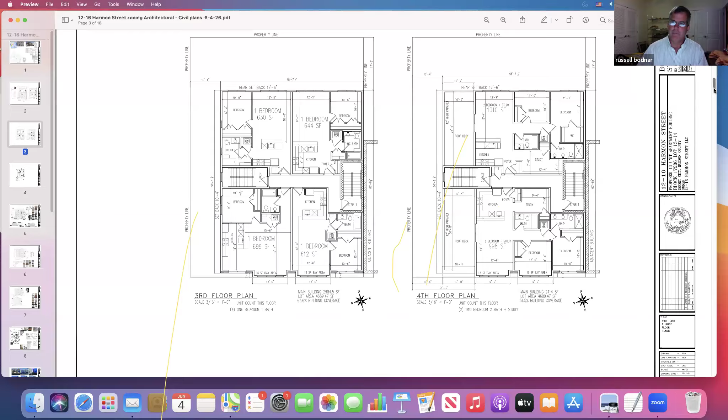By doing so, I needed an extra staircase, because with a 3-story building I'm allowed 1 stair, but with a 4-story building I'm required by code to have a second stair. On this level we have two bedrooms: a 2-bedroom study in the rear at 1,010 square feet, and a 2-bedroom study in the front at 998 square feet. So as we said earlier, we have the 10 one-bedrooms, the two two-bedrooms, and the one three-bedroom, which is our affordable unit.

If we go up to the roof deck level, we have a roof deck that's 750 square feet, as you can see here, and we are set back from the front yard, basically from Harmon Street, 13 feet 5 inches.

We were also set back an additional 7 feet from the neighboring property to the left, which gives us basically 28 feet from their property on that roof terrace down to their property. So if there's anybody on that roof area, it's an ample distance away, almost 28 feet from their property, almost a whole rear yard and a standard 100 on a standard R1 at 30 feet. We're trying to accommodate that. Even here from the rear, we're 17 feet, another almost 10 feet, that's

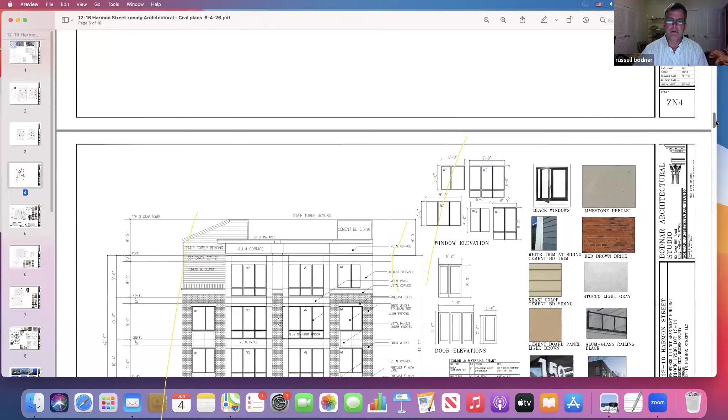27 feet from the back property line to the rear deck as well. If we go down a little further, this is our elevations, our street elevation. As you can see here, we have that 3-story space on the left-hand side, and then we bump up to a 4-story space. The only thing still raised a little, that's set back, is the stair tower, because I was required to have that extra stair tower. If we go down a bit further, you can see how we're doing our massing.

At the other end of the block, past Randolph, between Randolph and Grand Street, is called NC1. NC1 is allowed to be five stories the entire block. So right now there's an approved 5 stories at the end of the block on Grand Street, and I know of another project going in here that's going to come in as of right as well. There will still be only the vacant lot on Randolph left out of the entire block on the left-hand side. This has nothing really to do with our project.

We're just saying this is a 5-story building on the left. The existing building on the right of us is a 5-story building built about 3 years ago. We are now stepping down to our 4-story building right next to it, and then a 3-story building adjacent to that. As you can see with the grading coming down, basically the top of their 2-story plus building is basically the height of our 3-story building, so it's pretty much comparable to what they're having.

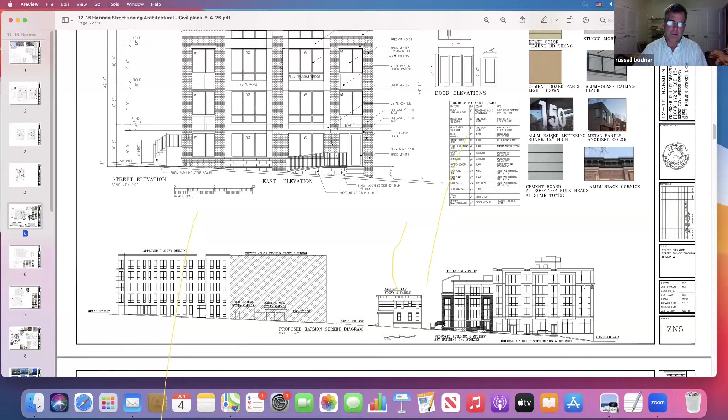And you can see here, now we left ample room. The only thing we have here is a staircase that brings us down, the stair coming down, because I need a means of egress out, to that staircase that walks along the side of the property. As we come here, you can see the rear of our elevation has just, basically, a vinyl fence all the way around the property at the rear. This is just a rear elevation showing some windows and some doors going out to the backyard.

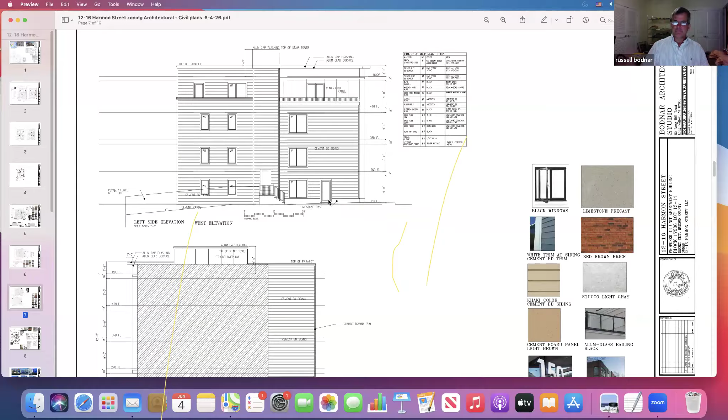As we go further down here, this is the side the neighbor would be looking at, the left-hand side, the west side. We did put some windows in along that side. There's not a ton of windows, but we did have nice siding and windows, and that little terrace on the upper level with some cement board paneling and other decorative items. So the side of the building has a bit more appeal, not just a flat wall, like you can see on the other one that's right up against the property line.

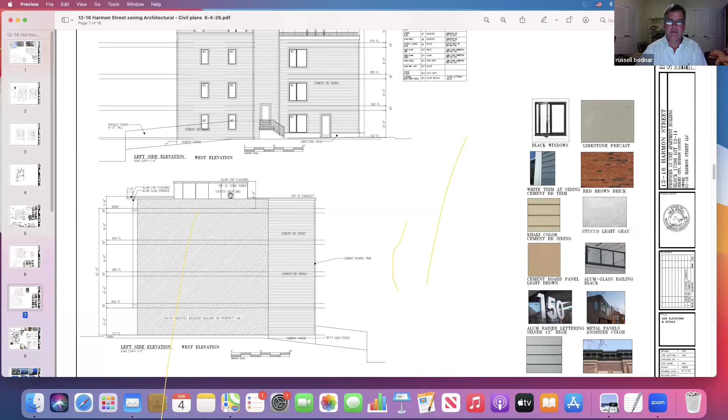If we build an as-of-right building right against the property line, I can't put windows on that side. So you're just stuck with, on the right-hand side that abuts the other neighbor's 5-story building, just a blank wall. There's nothing on it, just a little bit of siding where they have a jut-in, but the rest is actually a hatch section that's literally pressed up against the adjacent building.

Hold on, one second please. I'm talking too fast for you, I think.

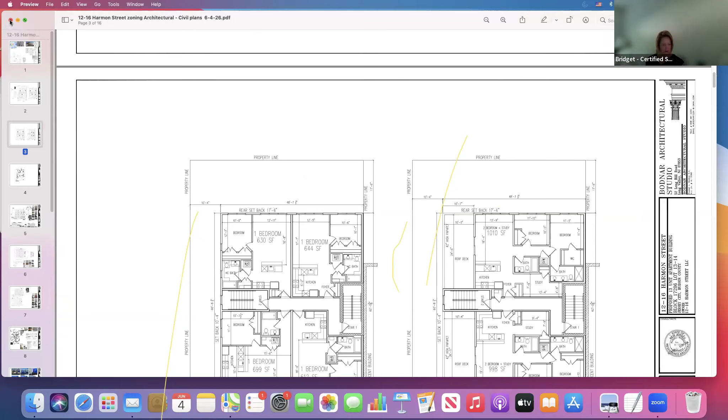No, Russ, stop, Bridget had to step away. I have to shut my in-the-wall air conditioning off, it's too loud. In an old apartment here. And yes, you are too fast, both of you, so slow down. Sorry, Bridget. Thank you, you're always sorry. Okay.

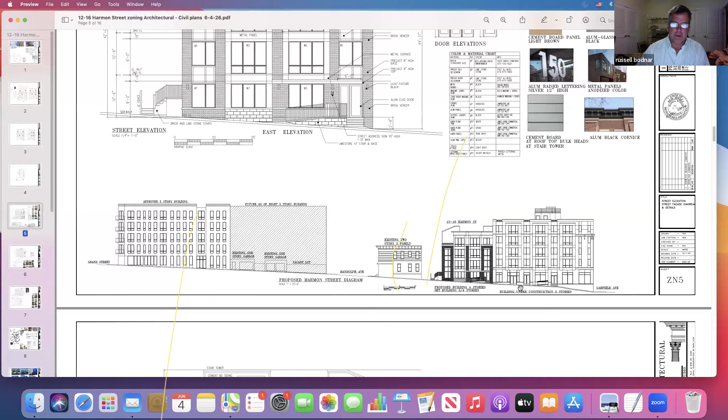Basically, we're trying to go in a way. We went away from the original 5-story building that had parking, which is one of our variances we're going to need now because our lot's more than 50 feet wide. But we went away from the parking, because they didn't want a very tall building, to get the 4-story building in with the drop down to make it 3.

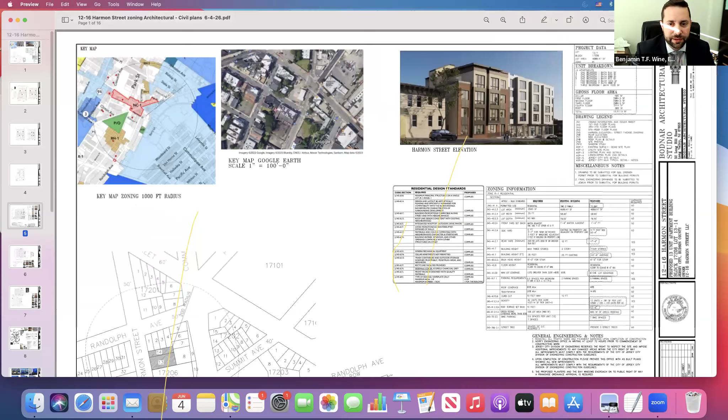Russ, talking about some of the site conditions, I want to confirm for the record again, as I indicated in my opening, we are well under on the coverage. I think the board now sees why we were able to do that with that large side yard setback. But I just want to confirm we are nevertheless proposing stormwater management on this site. Is that correct? Correct, we are proposing the stormwater management.

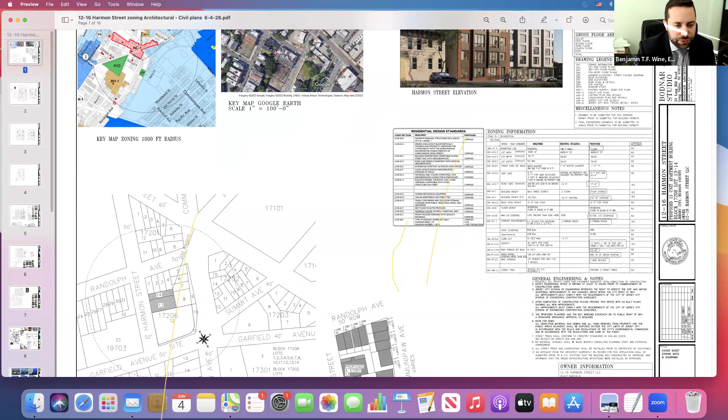Okay, so that will make it, even though it is well under coverage, a better condition than would otherwise exist. Is that right? Correct. And then in terms of the streetscape, if you can just go to the site plan sheet, I want to confirm the street trees, the sidewalk repair, things of that nature.

Yeah, we'll go back down. Can I interrupt one second? I just wanted to let you guys know that Commissioner Shadid is on. I just promoted him. Okay.

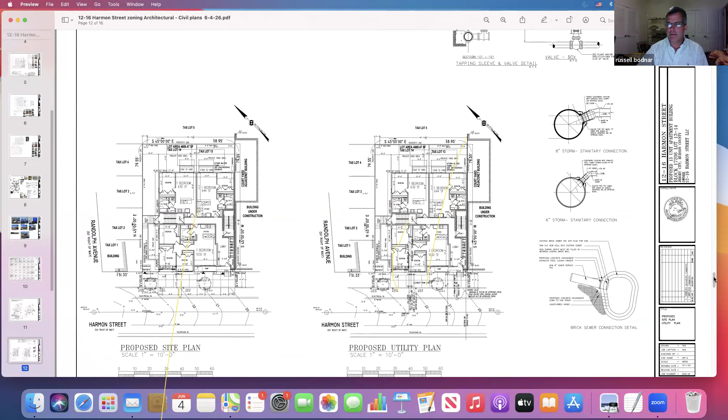All right, as you can see here, this is our proposed site plan. You do have the two trees now we're adding to the site. We also have some landscaping around the corner. If we go to the landscaping plan further down, you can see we have landscaping in the rear of the property, landscaping in the front, and some landscaping on the side here as well. So we added a lot more landscaping than we originally had on the original design, as well as having our two street trees that we're required to have, since we are a 50-foot lot.

And Russ, staying on the landscape plan, so all that area on the side, that's just proposed as green grass right now. Is that right? Yes, we have a little sidewalk that goes back to the staircase, but the rest is all green grass, and this is also all green grass all the way around. We just have a little walk out to our yard in the rear.

And then the rest of this is landscaping along the rear, and some landscaping items up here in the front as well as in the front of the building, because our three bedrooms are there, and the bedrooms were on the front of the building, and we're pretty low to the ground there. I wanted to make sure we had some landscaping to kind of break it up when you're walking down the street, so you're not just right up against the sidewalk to the bedrooms.

Okay, and Russ, one other thing I didn't have a chance to ask you ahead of time, so I'm doing what no lawyer should do and asking his witness a question he doesn't know the answer to, but I'm pretty sure I know the answer. I did speak with Miss Webb earlier today, the neighbor. Actually, this is a good shot because she is tax lot 3, so that's to the left. And I did offer, and I spoke to our client, and he's perfectly fine with it. I just want to make sure it's okay with you from a site plan perspective.

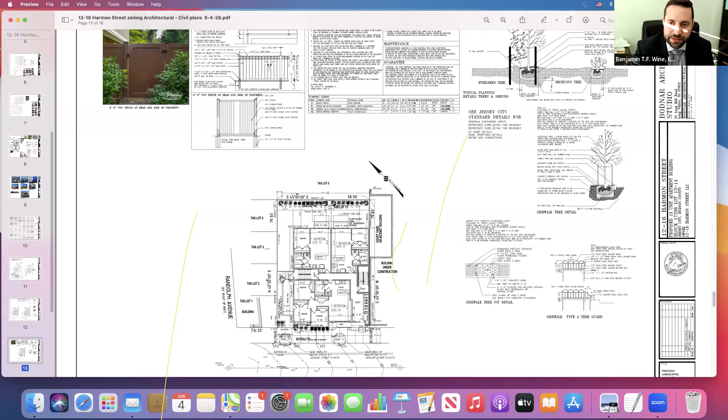Okay, perfect. All right, Madam Chair, I think that's all I have for Mr. Bodnar at this time. Okay, do you have any other witnesses that you're going to bring forth? I do, unless you had questions of Mr. Bodnar first. We'll save our questions till the end. Sure. So with that, like I said, I do have a site civil engineer. I don't intend to call him up. There's not much by way of engineering beyond the stormwater that Russ testified to, but he is here in case the board has questions afterwards. So with that, I would call up our professional planner, Charles Heydt.

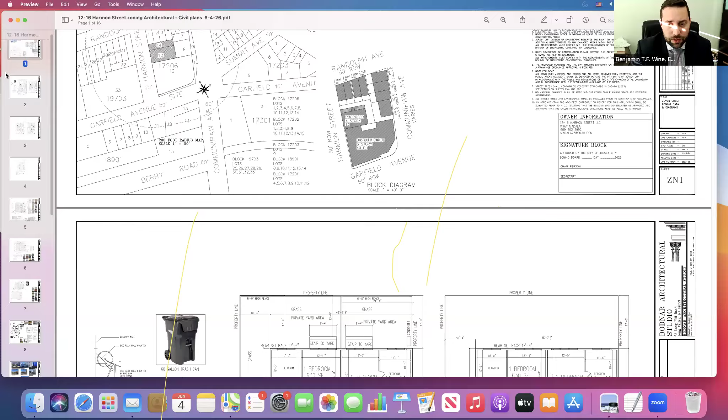Hi, good evening. Hi, Charles. Would you raise your right hand to be sworn? Yes. Do you swear or affirm the testimony you're about to give in this proceeding will be the truth, the whole truth, and nothing but the truth? I do. Thank you. Okay, and Charles, just for the record, you could go through your whole qualification list, but suffice to say, your license is in good standing here this evening.

Good standing, and I have the distinct pleasure of working on a variety of land use applications throughout the City of Jersey City for the better part of the past 10 years.

Yeah, we've seen Mr. Heydt many times and we accept his expertise.

So, Charles, you heard the testimony that Mr. Bodnar presented regarding the overall existing conditions and proposed development, as well as the variances. I would ask if you can please walk the board through your presentation with respect to addressing the D&C variances that we have. Yeah, I'd be happy to.

Good evening, board members. It's nice to see you all virtually. I know through the summer there's been a change in venue here. We had the opportunity to engage with this application team and truly try to envision a project that balanced what the development and the property could generate or accommodate, and how these properties sit within one another on the subject block, understanding the overall neighborhood.

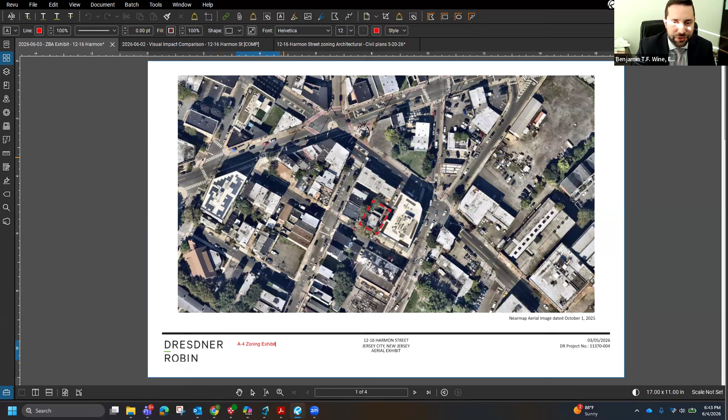And then our second exhibit is the zoning visual impact comparison. So I'll mark that. Board can probably recognize this intersection. Is that A5? You're up to A4, or Ben, should this be A4 or A5? That should be A4, I think you just confused Bridget. You haven't presented A5 yet, you just alluded to the fact you will present A5. Correct. Okay.

Okay, so this is A4. The board should probably be familiar with this intersection, eloquently referred to as the junction. It's identified in the master plan in a small area vision, where we look closely at some of the dynamics of this neighborhood. Just to the west of Morris Canal, a little across Garfield Avenue, a little further south is Berry Lane Park. Off this screen to the west is Arlington Park. It's referred to as the junction because of 3 main intersections, the confluence of 3 main roads: Communipaw running east-west, Grand running east-west, and Garfield Avenue running north-south. The subject property, highlighted in red, is located just a block off that intersection of those 3 major roadways, and ultimately it's a unique area in the city.

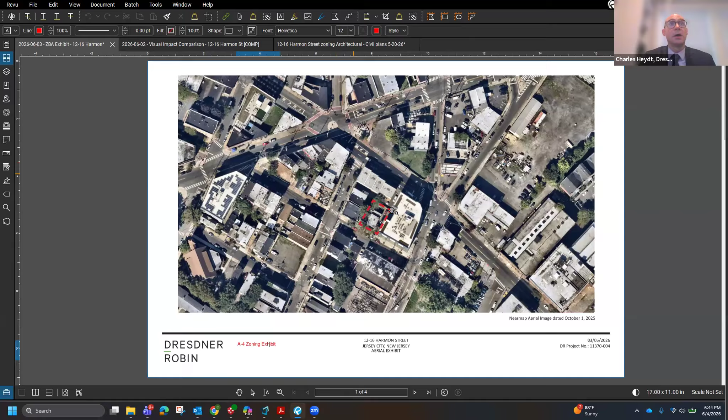As I zoom in here, you can see the rooftop of the 5-story apartment building we were referencing earlier, and the other rooftops. This property is the only interior lot on the block.

What that means is it's the only lot with frontage on Harmon and 2 side yards. The adjacent properties along Randolph—one is a corner lot, the other has frontage on Randolph. So while it's our side yard to our west, it's the adjacent property's rear yard. We're meeting a side yard with a rear yard, which is just a unique scenario. It does happen in the city.

Obviously this block isn't your standard 200 by 400 foot block of parcels, but it's a unique condition that I think is probably the start of the conversation from a planning standpoint about how best to deal with a scenario like this.

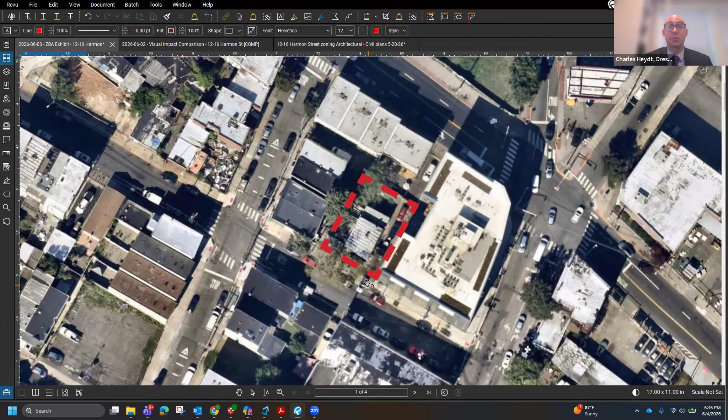I should mention to the board that the property is 4,689 square feet. We have approximately 59 feet of frontage on Harmon, and the site has 2 structures on it. One underwent a small fire and is no longer habitable—that's a 1-story structure—and then there's an adjacent 2-story structure. We do have photos if the board wants to review them.

From a zoning standpoint, as we mentioned, there's a mix of zoning within this neighborhood. You have the R1 zone, or the north end of the R1 zone. We have the NC district just across Randolph on Harmon Street. And there's obviously the Morris Canal redevelopment plan, where there's more intense multifamily development along Garfield Avenue. You can see the Berry Lane reference the street, but just south of that is Berry Lane Park.

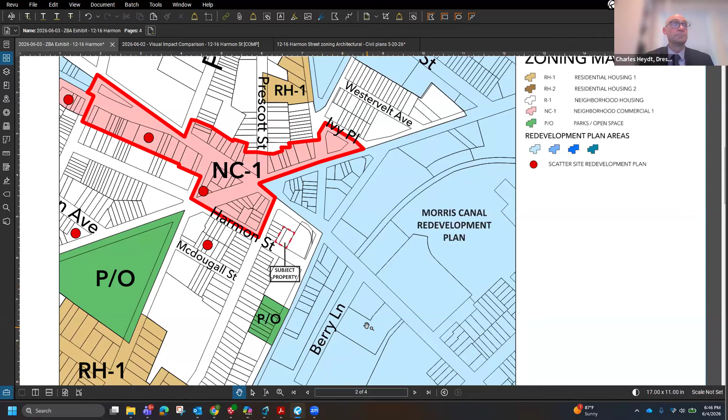One of the other aspects—and this is a slightly larger view of the overall neighborhood—I think was important when we wanted to present the existing conditions, is the sense of a diverse neighborhood. This is a very robust neighborhood, in my opinion. While it's referred to as the junction, it's one of the locations in the city that actually has a great deal of access to public open space.

You're 1-2 blocks north of Berry Lane Park, which is a tremendous asset in the overall community. You have Lafayette Park, which is a small walking path area, and then Arlington Park, just west of the subject property. Open space is always a key characteristic of a healthy, diverse community.

It's where you want to localize added residential units in a neighborhood like this, and in this neighborhood it has it. In addition, what we did on this aerial is highlight the transit in the neighborhood.

So when we speak of transit, it's really all alternate modes of transportation, including bus, light rail, and bicycle paths. We have a number of planned and shared use bike paths shown in green. This is a bike path along Grand Street that is protected and then becomes shared. There are other shared routes through this neighborhood on some of the side streets.

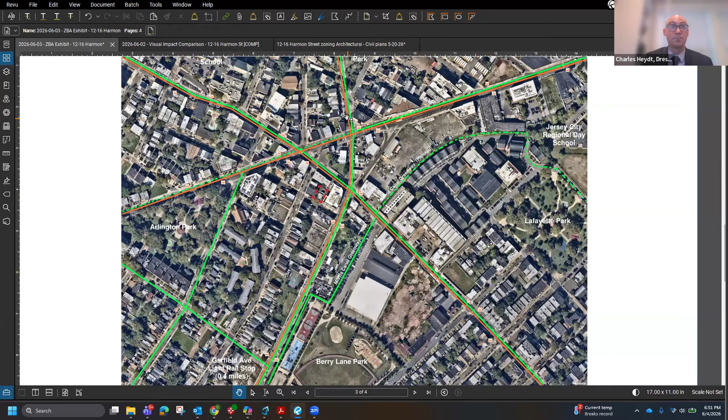As we look at some of the existing conditions of the property, I wanted to share some photos. This is the newer structure at the corner of Harmon and Communipaw, the 5-story building. In the middle are the existing 1- and 2-story structures. This photo shows a very good example of the rear facades of the westerly neighbor from the subject property, with approximately a 14-foot setback for the rear yard.

So these lots are quote unquote undersized as it relates to zoning. There's a walkout, more or less just patio space in the back of these properties, but essentially the existing condition of this single story structure is on a lot line, which would allow for a lot line condition to exist moving up. That's part of the analysis we did, which I'll get into in a minute.

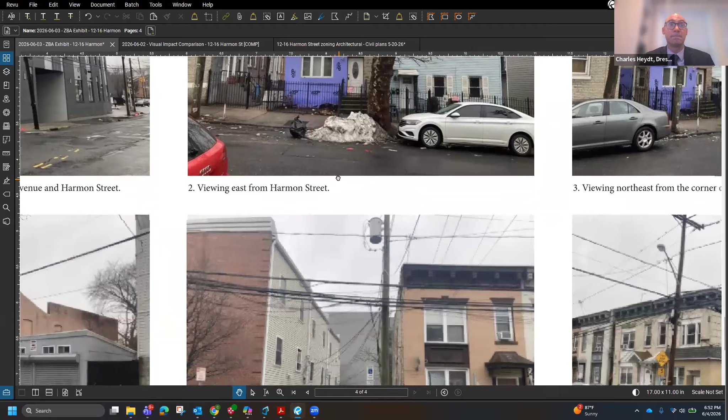Some of the other photos show the surrounding properties. You can see from the corner the 5-story structure in the rear at 475 Communipaw. You can see the grade change over the frontage of Harmon, and the two-story structures along Randolph. Our goal with the project, as mentioned before, is to continue this transition that steps down to the two-story homes on Randolph through a very appropriate design on this subject property.

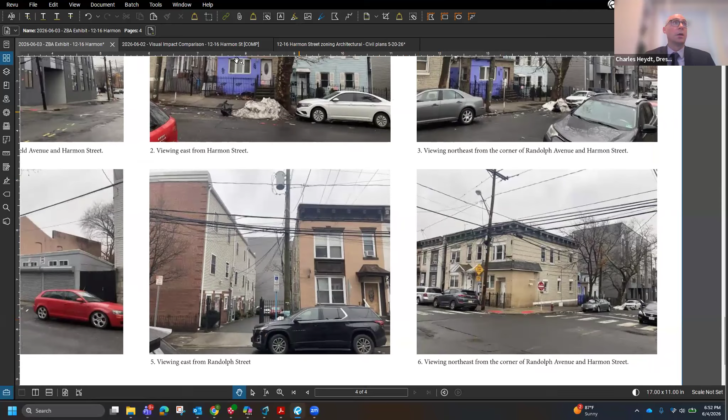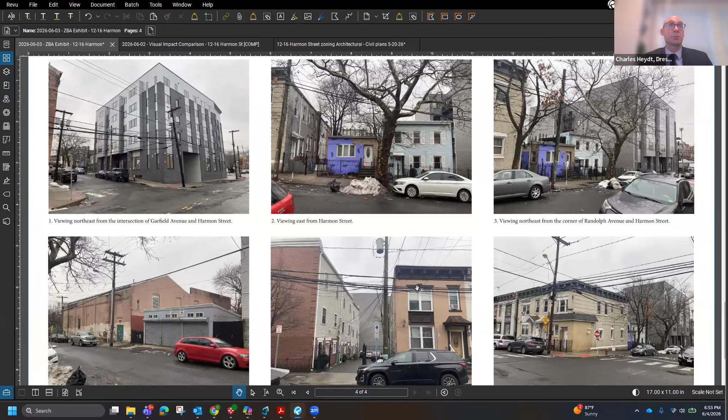With respect to density, we are at 4,600 square feet. The R1... sorry, I'm trying to stop sharing my screen. Give me a moment.

The R1 district does permit residential uses, so we're not requesting a D1 use variance, but it does limit the density of residential units to 42 units per acre. What's being requested with this application is 13 units, so it's in excess of the permitted 42 units per acre.

The adjacent property at 475 Communipaw Avenue is approximately 160 units per acre. That project was approved, but it's not necessarily the same type of development—it was an automobile car wash, so we were transitioning a non-permitted use into a permitted use. But we clearly have a less dense development than that subject property at the corner.

There are other developments in the area referenced earlier. 747 Grand is a 36-unit multifamily just a block to the west, as well as 509 Communipaw, which is equally 36 units. So not to compare the unit count directly—we're only 13 units—but to note the reality that there are multifamily developments within this immediate neighborhood, within a 1 to 2 block proximity.

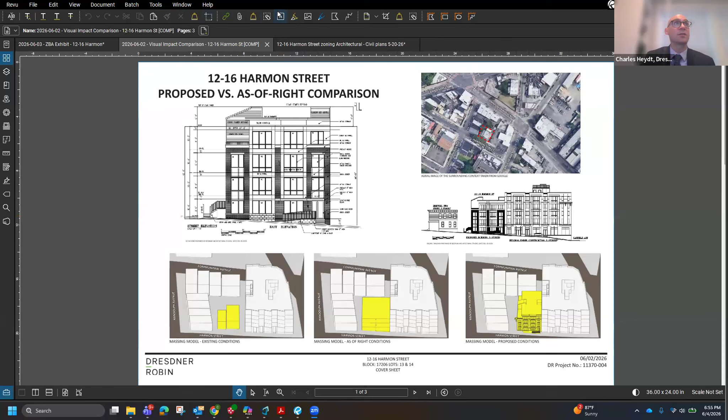The next exhibit I think is helpful is what we prepared this past week to help show the board this transition of floor area. I'll mark this as A5. Yes, and Charles, can we just call it the visual impact comparison? Yes, okay. We submitted these, but I'll submit the marked copy as well after the evening.

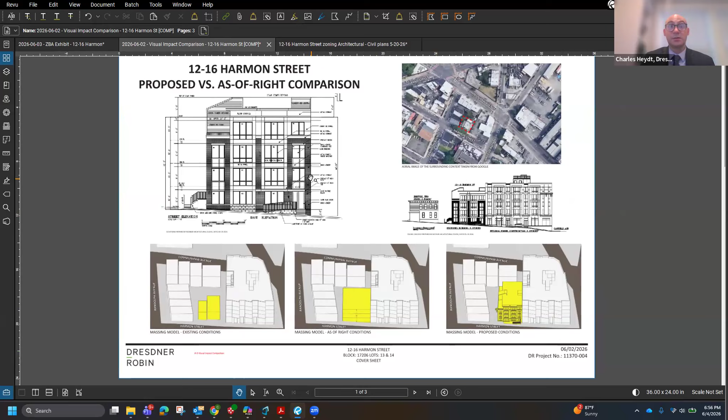What we did, in a very technical manner, was scale it to the existing surrounding developments. We took the overall elevation of the facade as designed by Mr. Bodnar—the 3-story section in front and the 4-story section to the east—and modeled that in a 3D environment. This shows the massing, and you can kind of see some of the texture of the facade treatment on the proposed structure.

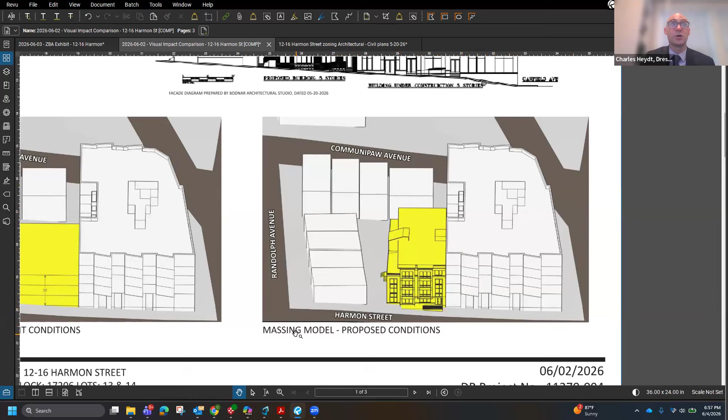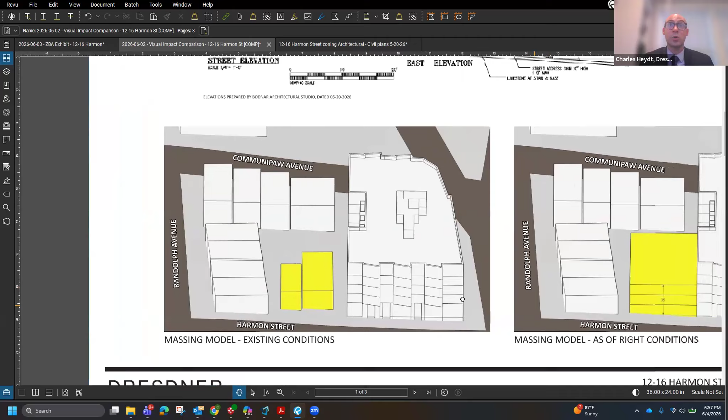It shows the massing as it relates to the adjacent 5-story structure and the adjacent 2- and 3-story structures on Randolph and Communipaw. But more importantly, starting from the existing conditions, you can see the 1-story and 2-story structures that actually sit on the property line and have the greatest impact to the Randolph properties. 3 stories is permitted in the R1, and we tried to understand what a permitted zoning envelope would look like—this has a rear yard of 19 feet and 0 lot line, 0 side yard setbacks.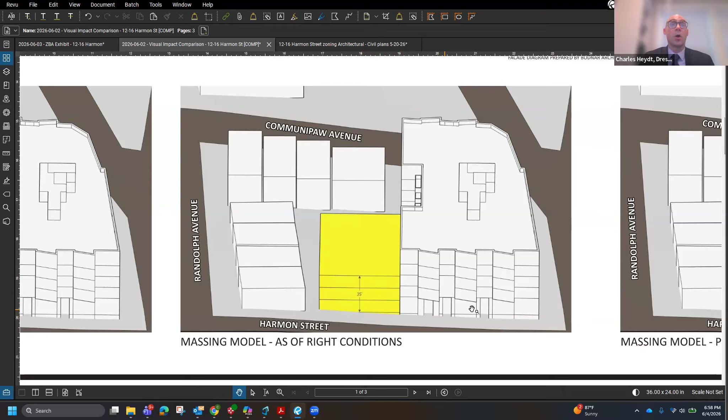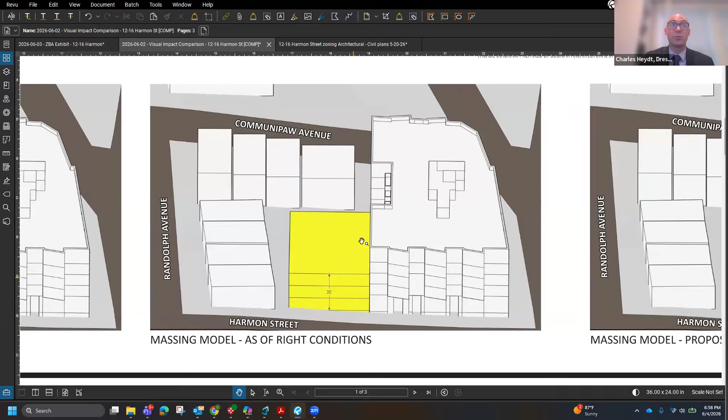Ultimately, this floor area is what would be permitted by way of this overall massing under R1, because of the size of the property and the existing adjacent 0 lot line conditions. Part of the process here is to understand that this 3-story structure along our side yard is actually marrying against a rear yard for our adjacent neighbors to the west. Is there a way we can make that setback better without losing or sacrificing some of the entitled zoning that would be generated on the site?

What we did was ultimately say, can we set back our side yard, where 0 feet is permitted today, approximately 10.5 feet, 10.4 feet to be exact. And then can we transition some of that zoning envelope, the floor area, to a 4th story on the east side of the property, further away from the rear yards of the adjacent properties to the west.

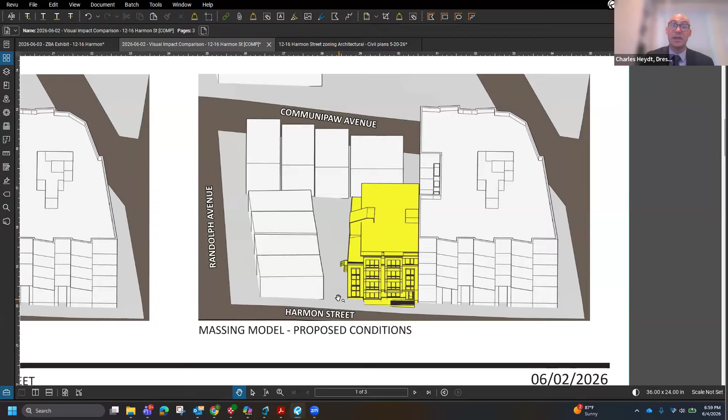This exhibit kind of walks you through that process from a massing standpoint. Again, you can see the roof lines of the 5-story building stepping down to the 4th story, then stepping down to the permitted 3-story height, and then providing that greater 10-foot separation between the building and the lot line, which in my opinion is an improvement beyond existing conditions and an improvement over what's permitted by the zoning envelope. So hopefully that was helpful for the board.

You can see here from an elevation standpoint, taking a minute to load, the 5 stories going to 4 and going to 3.

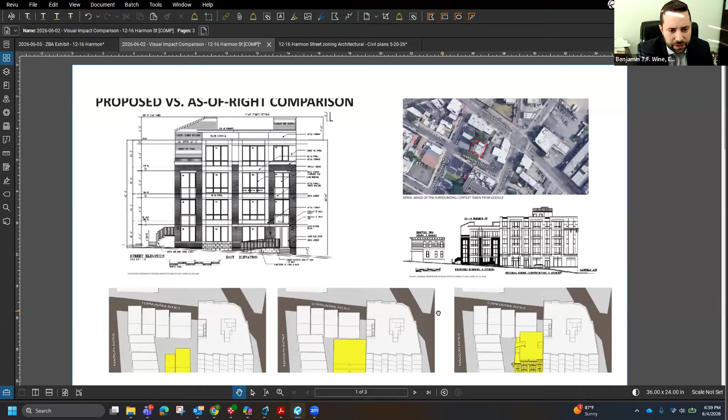Charles, just before you move off this exhibit, I think it's good. Just a quick question. In that 3-story as-of-right configuration that would be before the planning board, this is what you were alluding to before regarding the affordable housing overlay, so the 13 units in that arrangement would be permitted. The only reason they're not permitted here is because we're seeking that height variance, effectively being sought in order to take that bulk and put it further away from the residents.

Is that fair to say? That's exactly correct. That's the intent of the affordable housing overlay, to allow for more density and not require a D5 density variance if you are within your zoning envelope. The minute you have any added stories, that's where you come to the zoning board of adjustment. But 13 units without a density variance in this scenario would be permitted. Okay, thank you. Sorry, you can keep going.

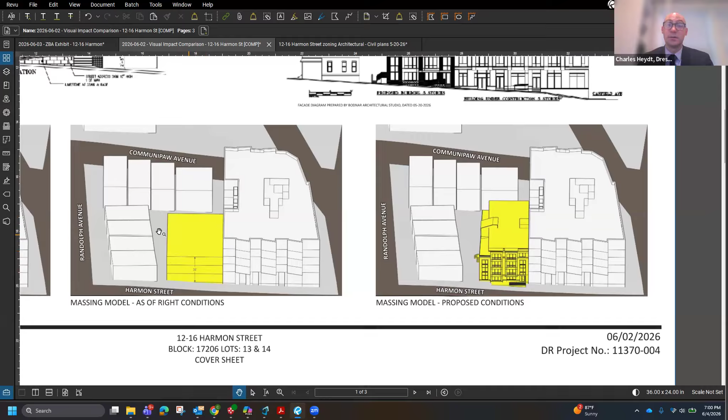Okay, and this gets a good segue to the relief we are seeking. Again, we're seeking relief for a partial 4-story on the east side of the property. The overall building height to the roof line is 43.5 feet, where 35 feet for 3 stories is permitted in the R1. Ultimately, that building height only occurs at approximately 20 feet from the side lot line, and it's a partial 4-story. I presented the information earlier on the intent of relocating the permitted zoning floor area to the 4th story. I do believe this is a better design alternative.

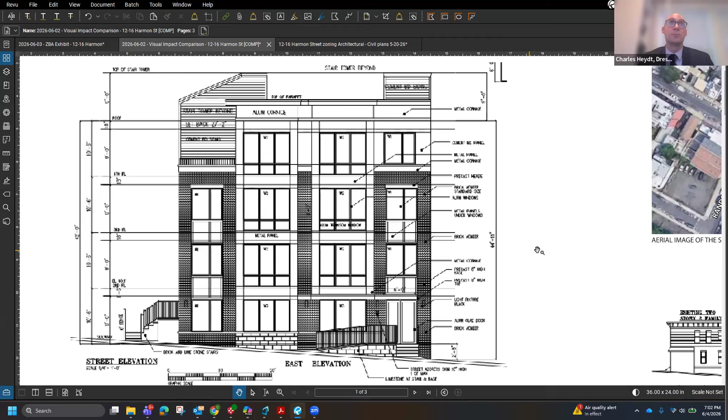In terms of consistency with development in the surrounding area, there are 5-story structures. Immediately adjacent to the east is a 5-story structure. We are tiering down from that structure to create a very nice, clear transition to what is west of this subject property, which is 2-story buildings. Ultimately, those are part of the elements that I believe meet the justifications for the density variance and the building height variance being sought as well. So hand in hand with the overall building height in feet, we are requesting the partial 4-story variance where 3 stories are permitted, for the same reasons: creating that transition and relocating the floor area.

There are 2 other variances I did want to touch on briefly. One is with respect to the rear yard setback. Part of the evolution of this project did at one point try to accommodate a full level of parking on the ground floor, where we thought the benefit of providing the parking would outweigh the detriment of having a full enclosed parking level. So that did have a 0 rear yard setback. In the process of understanding some of the concerns about air and light within the interior of the subject property, we removed that full parking level.

We reduced the overall number of stories from 5 to the partial 4, and ultimately we provided a very healthy rear yard. The rear yard being proposed is 17.5 feet. However, based on the calculations for rear yard in the R1, approximately 19 feet is required.

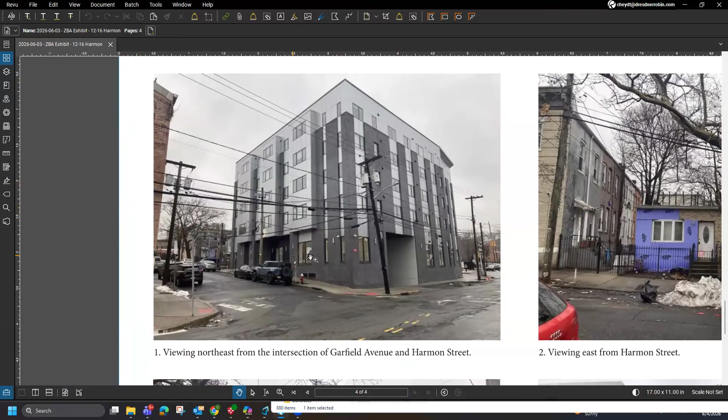I think this was some of the images that we had. This is at the corner. Gray brick, metal paneling. There's houses on Harmon Street with white brick colored buildings, and gray and lighter shades. You can go to a different color. That's not a problem. You have to see it, so it might be helpful to view it this way.

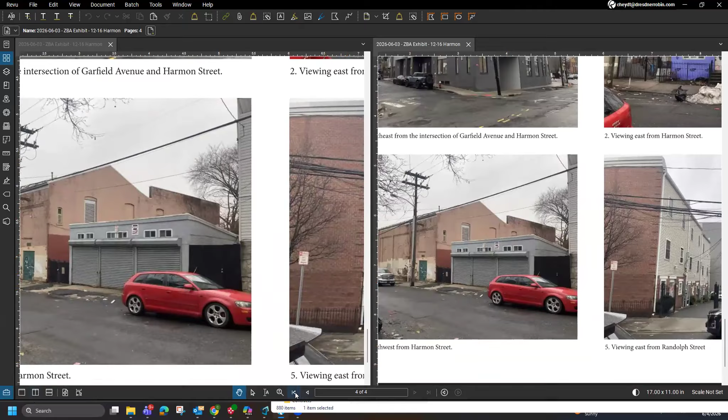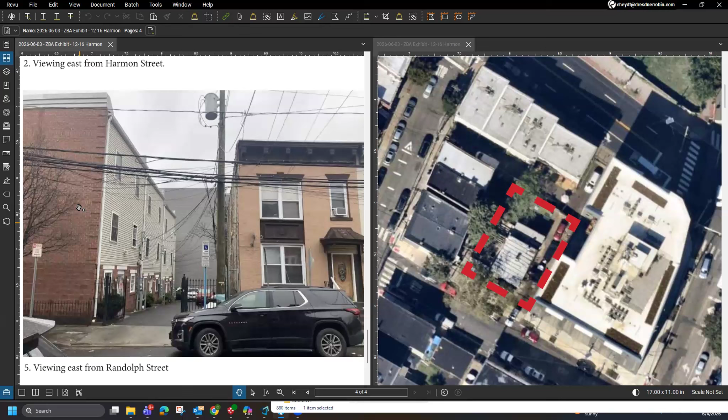So we just looked at the gray brick, which is here to the east. I see that one. I'm looking for the homes in that neighborhood that have not been altered or touched. So this is an angle of the driveway here. You have the 3-story townhouses and condos, that red brick along Communipaw and onto Randolph.

And I think we have a shot of these lighter brick buildings. They have gray, white, and red in the area in terms of brick color. So in no way is this building replicating what is currently in that neighborhood. I just wanted to point that out. Go ahead, Charles.

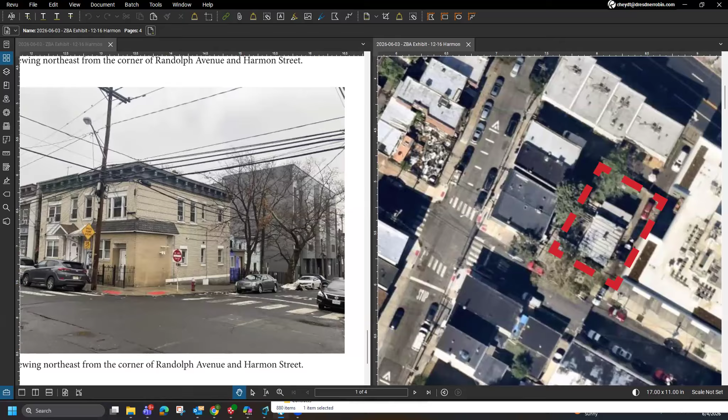I think Russ can bring up an image, but this isn't in a historic district, so while consistency with facades is important, I'd say part of this design is trying to transition between a modern structure that was already approved with its own architecture, into something somewhat similar but different, still incorporating brick. So I don't think there's a requirement to match any one specific type of architecture, given we're not in a historic district or doing a historic preservation type of project.

I guess the question I'd ask Russ—because I think the chair, whether Chair Coyle is referencing it specifically or not—the R1 does have design standards, right? And I think part of that does talk about some of the things you've alluded to. Obviously this was our shot at that, but the question I'd have for you, coming from the chair, is: is there any way—like right beside us is all light brick—can you change the motif to mirror that light brick if that's the board's desire?

Yeah, we can easily change it to a lighter brick. Right now it's red brick; we can go to a lighter shade, more of a beige brick. We can also change the bays—right now they're more of a metal cladding—we can go to more of a cement board panel cladding with different colors on the cement board cladding. We can dress it up a little more historic looking, to give it a more classic feel. Okay, that's not a problem.

And we already have siding on the top layers, as you can see. I guess I can't share the screen again, but I have this other rendering in front of me. Yeah Russ, you can bring it up. Here, let me share this. Here's the original rendering on the front sheet—and for the record, Bridget, this does not need to be an exhibit, it was already part of the original rendering. But as you see here, let me try to make this smaller, guys. Sorry, let me just make this.

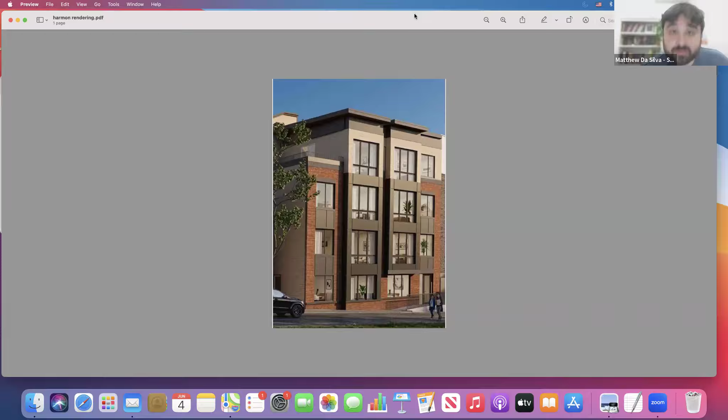Staff prepared an original report dated March 3rd, 2026, but there was a reissue on June 3rd, 2026, reflecting the redesigns that Mr. Wine's client made in response to community feedback, and clarifying the changes in details. That said, the general analysis of the report stays intact. This is sort of a transition area—as Mr. Heydt said, you have a 5-story structure on one side of the site and 2-story townhomes on the other.

This project is trying to bridge that gap in mass, and it is arguably particularly suitable to be that bridge in the transition. As was mentioned, this is an inclusionary zoning ordinance project. The applicant is asking for more density than would be allowed, as well as more height, which triggers the 10% affordable housing requirement. They are below the 15 units that would normally trigger such a request, but the applicant has agreed to voluntarily comply anyway.